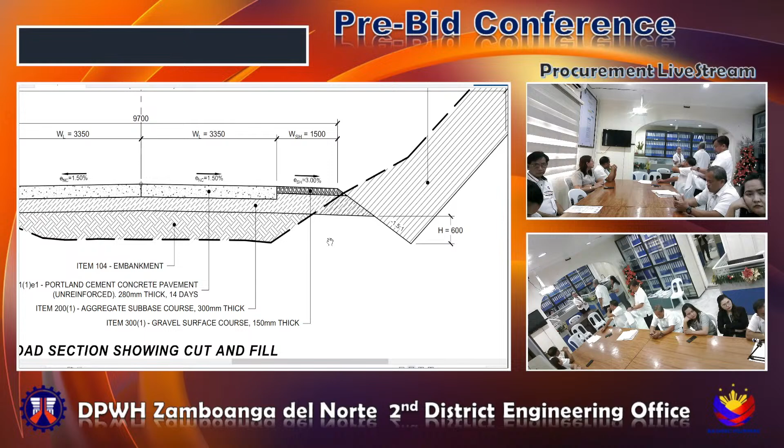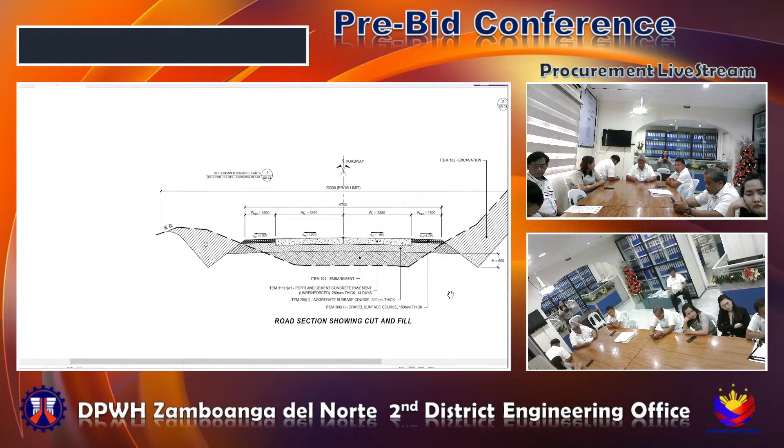For the typical road section, the scope of work includes construction of a 3.35 meter wide concrete road with a thickness of 280 mm PCCP. We also have to construct the shoulder of 1.5 meters with Item 300 of 150 mm thick. Aside from that, there will be installation of roadway facilities - metal guardrails, metal beams, and application of thermoplastic pavement markings. Basically, this project is a continuation of the ongoing project, since this is under a multi-year program of the government in coordination with the DTI and DPWH.

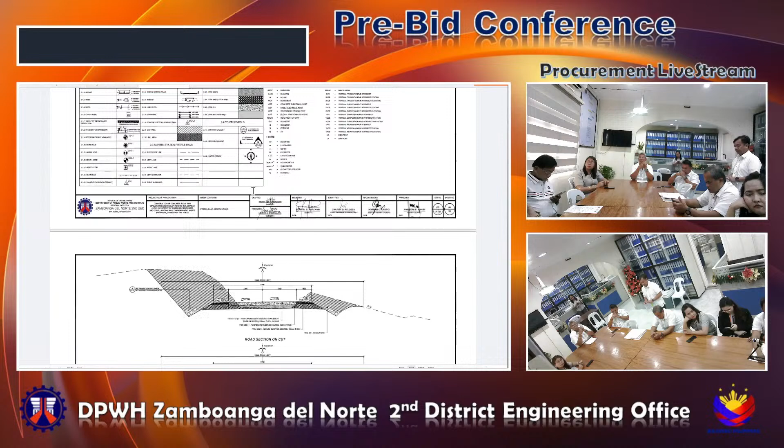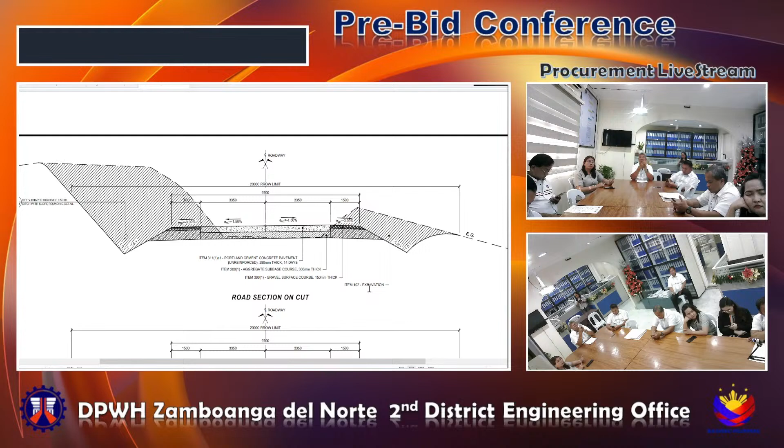For the second project, 25GC007, construction of concrete road, National Road Junction, Dipolog-Sindangan-Liloy Road Junction, Dinasan, Lipay, in support of Agribusiness, Rubber, and Coco industries in Zamboanga del Norte. Again, this is a convergence program with the DTI and DPWH. For this particular project, the same roadway cross-section applies: the width of the road is 3.35 meters with a thickness of the PCCP of 280 mm, and the shoulder is 1.5 meters with the thickness of Item 300 gravel surface of 150 mm. This project also includes construction of drainage, slope protections, installation of guardrails, and application of pavement markings.

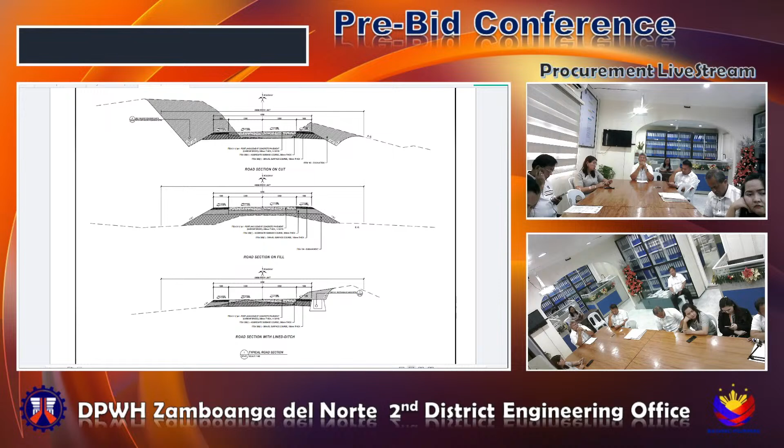For the third project, 25GC008, preventive maintenance of road, asphalt overlay, preventive maintenance of primary roads along Dipolog-Punta, Dansullan, Sergio Osmeña, Zamboanga del Norte, Zamboanga del Sur boundary road, from station 1853-580 to 1856-619. The scope of work for this particular project is an asphalt overlay at this particular station from 1853-580 to 1856-619.

This is the location of the project. It should start near the junction, then it will end at the boundary of our district jurisdiction.

For the typical road section, since this is an overlay, the thickness of the overlay is 50 mm - Item 302, Item 310(1)a, or bituminous concrete surface wearing course, hot-laid, 50 mm thick. But before application of this overlay, we need to first remove the existing overlay of 50 mm thick, then clarify the areas that need to be overlaid.

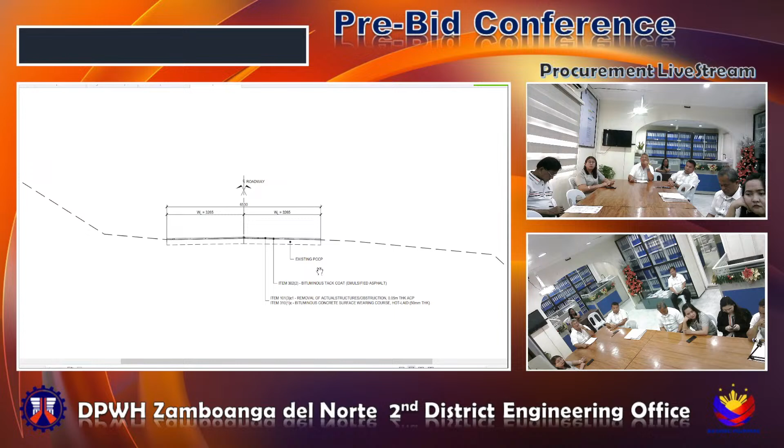Aside from that, this project also includes application of pavement markings, both white and yellow pavement markings. So that's all for the DED plans for these three projects.

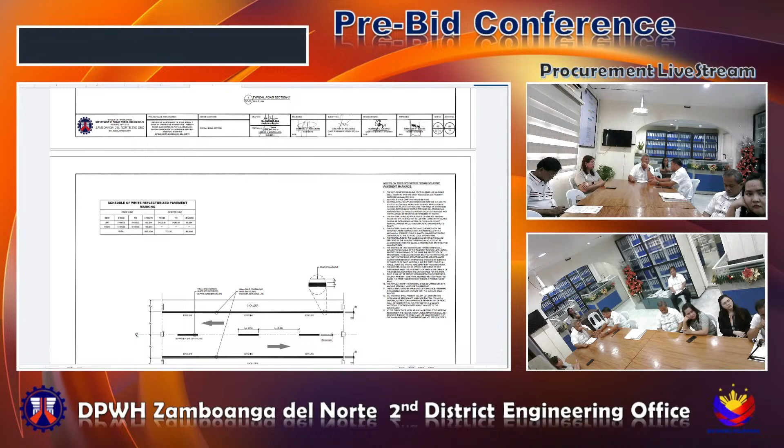Okay, so next let's go to the eligibility requirements for the prospective bidders.

The prospective bidders are encouraged to enroll in the CWR. They can do so by accomplishing the CPIP or the DPWH Contractor Profile, I mean the CCASI, the Contractor's Confidential Application Statement for Inclusion, and then they will also be attaching the list of annexes, including the supporting documents of CCASI, and then they will submit it to the procurement service.

For the PCAB license for these three projects, these are shown on the screen. For the three projects, the classification for the PCAB license should be General Engineering GE1 Road. The size ranges for contract IDs 6 and 7 should be at least Small B, and for contract ID 08 should be at least Medium A.

Okay, now let's proceed to the technical component envelope. These are the documents to be submitted by the bidder for their technical component envelope. We have first the Class A documents.

First one is the valid and updated contractor's registration certificate. By submitting this valid and updated contractor's registration certificate, the following documents will not be submitted by the bidder: the registration certificate, mayor's permit, tax clearance, PCAB license, and the audited financial statements.

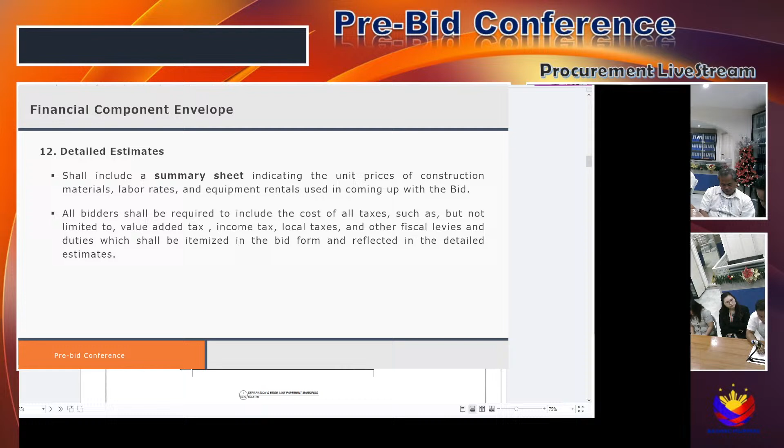For the third document, detailed estimates — there is no prescribed form, but make sure the bidder includes the summary sheet of unit prices of construction materials, labor rates, and equipment rentals used in coming up with the bid. All bidders shall also be required to include the cost of all taxes in computing their detailed estimates.

And the last one is the cash flow per quarter form, using form number 19. The basis for the cash flow should be the duration. Since this is an EPA, we will assume the project will be awarded during the first quarter of the following year. So I guess that's all for the required documents for the contractor, for their technical component envelope and financial component envelope.

I call our secretary to announce the schedule of the opening and preliminary examination meeting.

Yes, Mr. Chair, I would like also to acknowledge for the record, we have Engineer Christine Carrion, also from DPWH, as a member, as well as observers. We have Manjay Katangan from the COA audit team.

Now, for the information of everyone, the deadline of submission and receipt of bids and the bid opening shall be on November 18, 2024, at exactly 10 a.m., at the Procurement Office of Norte, the Second District Engineering Office. That's all for this session.